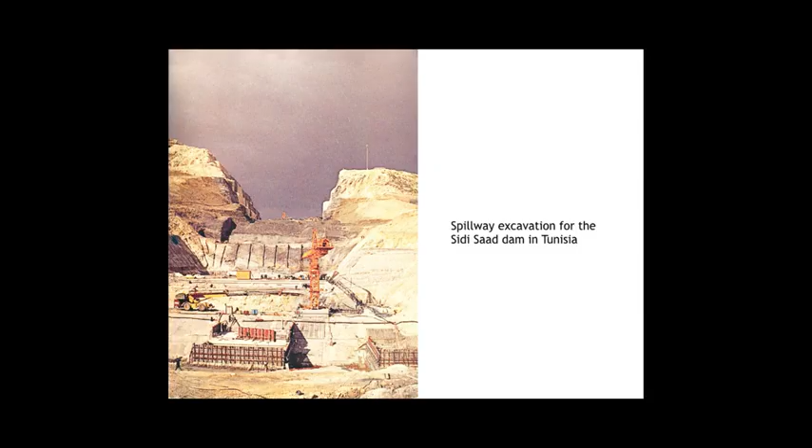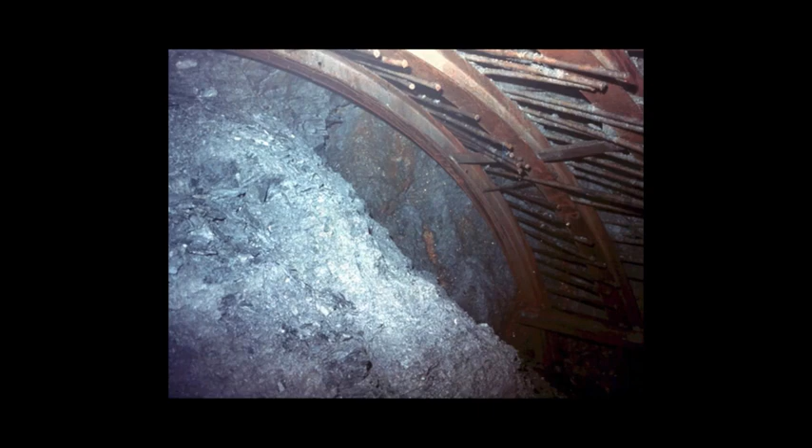There's a tunnel in India mining through a fault several hundred meters wide of very poor gouge material, and the only way that progress could be made here was by a technique of spiling, where what you have is a steel set. You drive ahead, just with a big hammer, steel pins which form an umbrella over the face, and you mine the face half a meter at a time, put in the next steel set and progress that way at several meters per year rate of face advance. That's not really the kind of material I'm going to talk about today.

Most of my experience is in the hard rock field, and weak rocks, to me, are those rocks which fail when subjected to the stress conditions of the environment in which you're working. I've just completed a paper with Don Moy, and the first paragraph of that reads: in the context of this chapter, weak rock is rock which will fail when subjected to the stress levels induced by the excavation of large underground caverns at depths of 100 to 300 meters below surface.

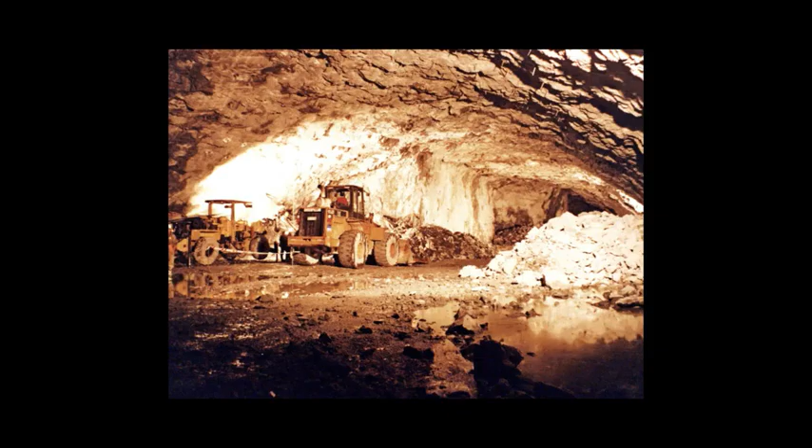Sedimentary rocks such as bedded sandstones, shales, siltstones, and mudstones are amongst the rocks which fall into this category. It's a paper on large underground powerhouse cavern design. But basically what I'm saying is that irrespective of what the intact rock is, if that rock will fail when subjected to the stress conditions of the environment, then as far as I'm concerned, it's a weak rock. And to take a ridiculous example, I'm currently working on a 33-meter diameter spherical cavern at a depth of more than 2 kilometers in the Canadian Shield.

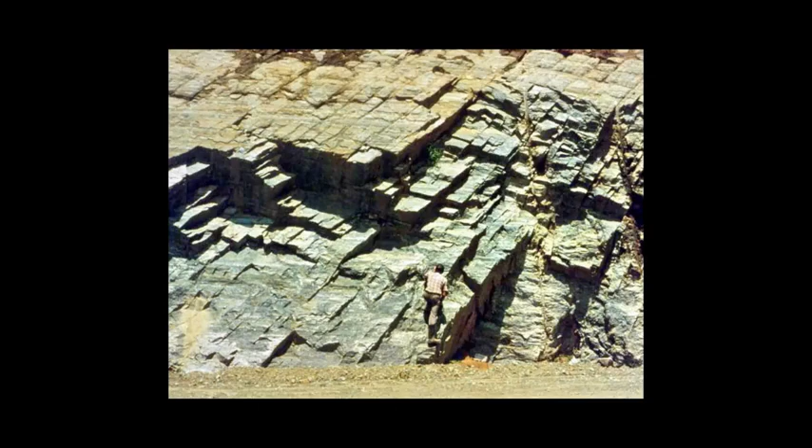And although the rock mass strength might be in excess of 150 megapascals, it will fail under those stress conditions. Now I'm not dealing with that end of the spectrum, but I'd like to pick up a comment made, I think, by Brian Hawkins on Monday, that we shouldn't forget the discontinuities. And it's those discontinuities, the joints, faults, fissures, bedding planes, that make rocks which are otherwise good rocks weak from an engineering point of view.

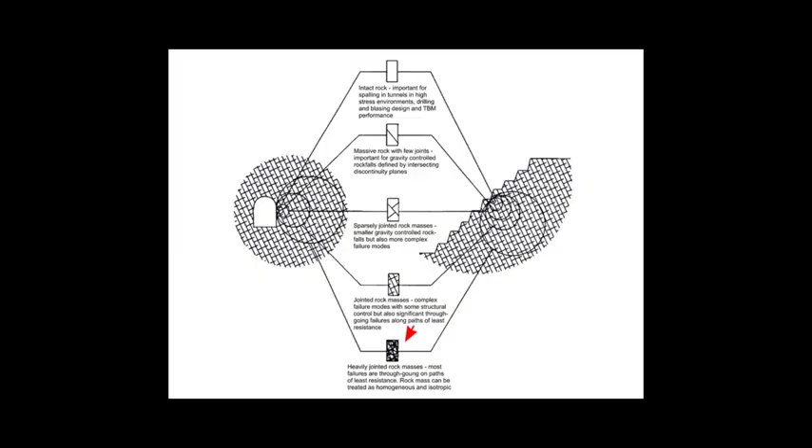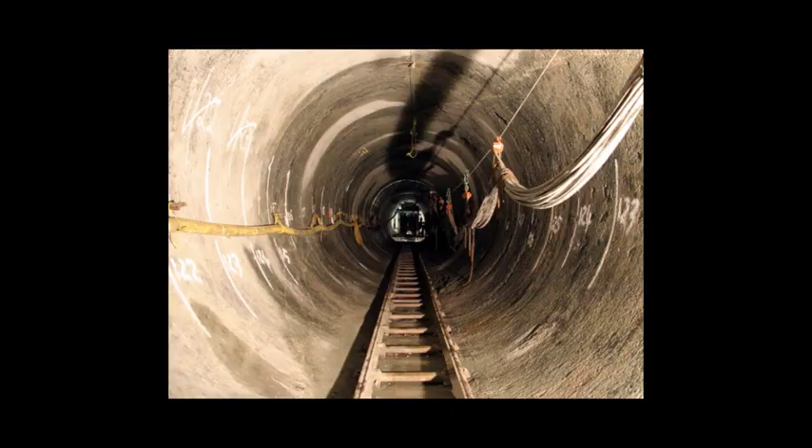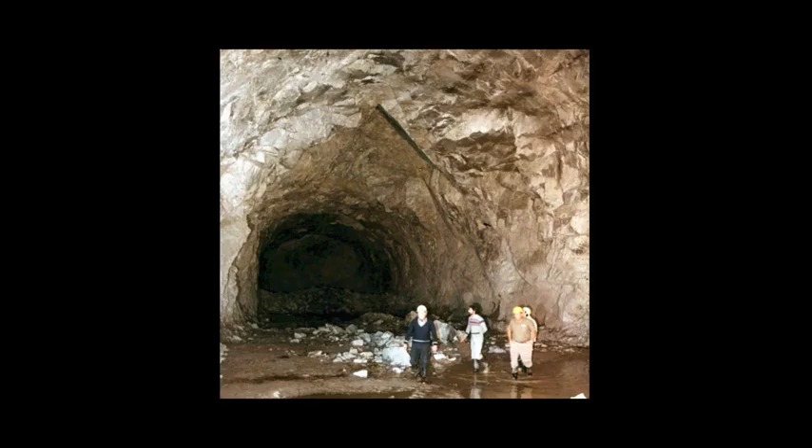But the introduction of one or more discontinuities leads us to the problems of stability in both slopes and underground or foundations that we have to deal with. A few discontinuities in relation to the size of the opening will result in structurally controlled wedges or blocks which fall from the surface of the excavation. But as the intensity, the number, and spacing of joints, to use joints as a generic term, increases, so one gets much more into the situation where the rock will fail almost as a homogeneous material with quite different properties from the intact rock.

In fact, what I'd like to do is to run simultaneously here an overhead, which is a slide from Nick Barton. And I've given the reference to it, if you can read it, right at the bottom there. It was published in a conference in Hong Kong last year. And in that slide, which I'll leave up while I go through these,

he's plotted here his rock mass quality, which is a tunneling index that I'm sure many of you are familiar with. And it's interesting that that index does not contain any reference to the strength of the intact material. It's really based entirely on the number of joints, the condition of the joints, and the degree of alteration. And if we work down from the very hard end, which you've just seen here, down towards the exceptionally poor end, many of the rocks with which we are concerned fall in the category, I would say, from very poor to fair or good in this area here. So I'll leave that on the board as I go through these slides.

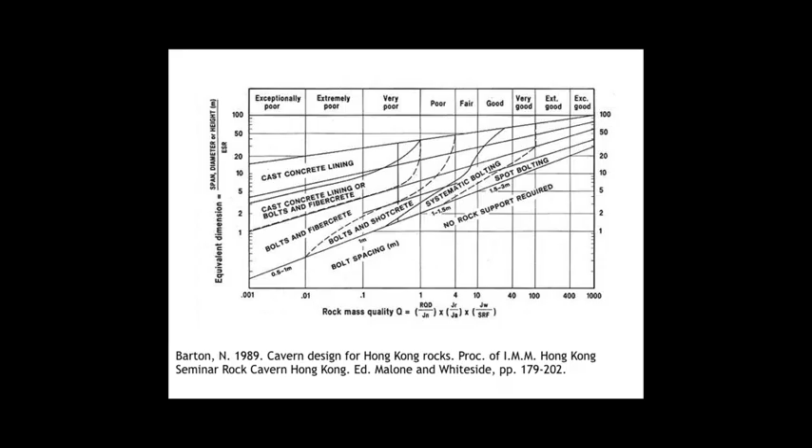This would be at the very good end, but you would have to deal with problems like this by limit equilibrium analysis. This is a typical wedge failure in a slope where you have, as you see there, two intersecting discontinuities with sliding along either one of those discontinuities or along the line of intersection. And the properties of the intact material really don't come into it. You're concerned here with three-dimensional geometry and with the shear strength on those two surfaces.

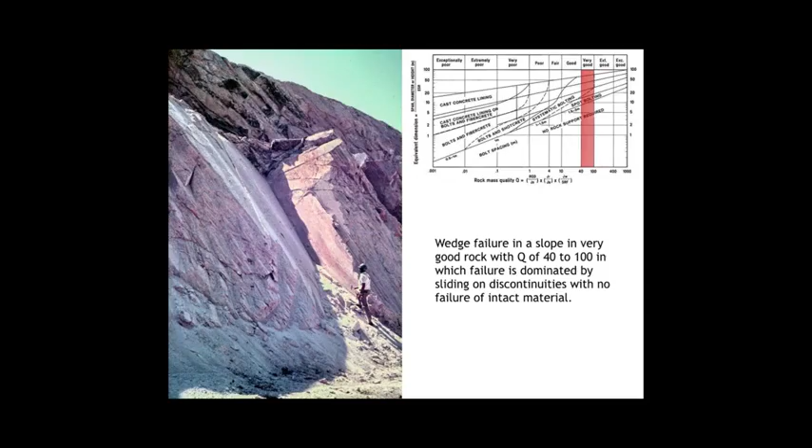So this is not in the category of weak rocks at all, but I'm just passing through this series as we work towards the weak rock end. Similarly, in the tunnel, you have intersecting discontinuities giving you this type of sidewall failure.

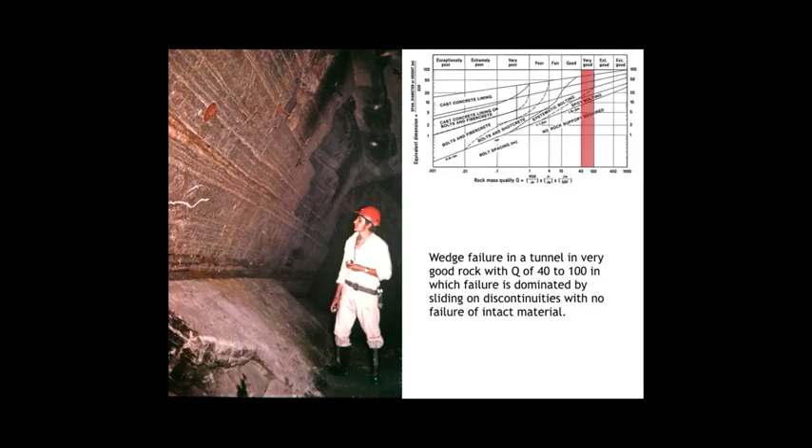As we add more and more discontinuities, here's a gneiss in Sri Lanka with very nice orthogonal jointing and a few weak features running through it. We tend to work more and more towards the isotropic homogeneous end of the spectrum, and in a slope like that, we might expect to see core of this type, where you still see substantial intact rock pieces, clean discontinuities, very little rounding of the particles in the core box.

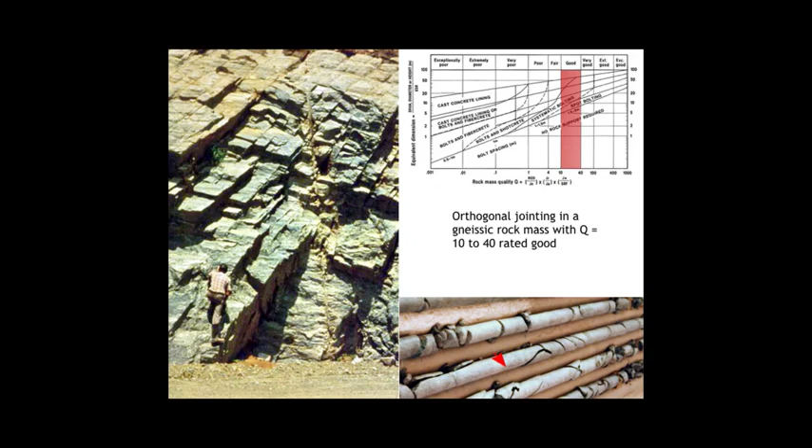A little bit worse, closely spaced and more of them, discontinuities, and we're now starting to get to the point where, on the scale of a very large slope, if you were talking of a slope several hundred meters high or a very large cavern, you might be tempted to look at this rock mass as a weak homogeneous isotropic system with very special properties. And the determination of those properties is something we'll talk about a little bit later on.

So we'd now be talking for this rock mass of something I would guess in the fair category on Barton's classification. I don't know the equivalent. Well, it would be pretty similar in Bieniawski's classification as well, pretty similar category. And we'd expect to see a lot more disturbance in the core here.

By the way, can you see that slide with the overhead on? Yes. It's not bothering you too much.

Okay. So what we're seeing here is fairly close spacing of discontinuities in the core, some disturbance of the core, perhaps some alteration on the surfaces as well, particularly if it's near surface and you've had weathering penetrating down into the rock mass.

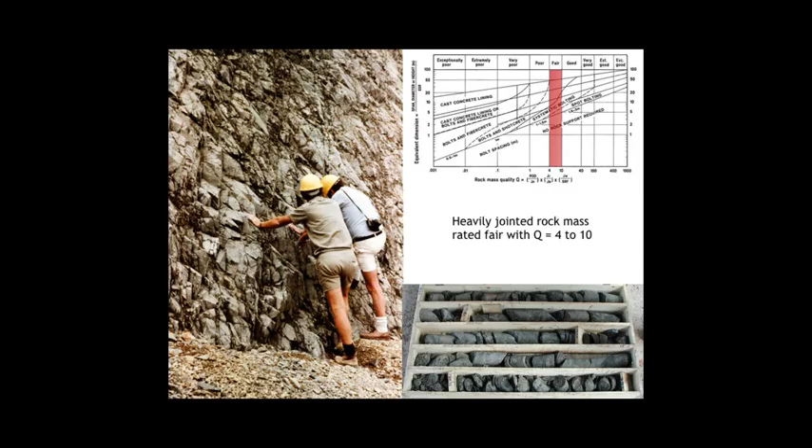And worse yet again, in an underground opening, this time with a lot of weak discontinuities, a pile of rock lying on the floor there. And in this kind of situation, you'd expect to see much, much more disturbance in the core. The core pieces are still pretty much intact. There's relatively little rounding except for a bit up at the top there where you see sort of gravel-type particles. And the interlocking of these particles plays a key role in the behavior of that rock mass. I'll talk about that in a moment.

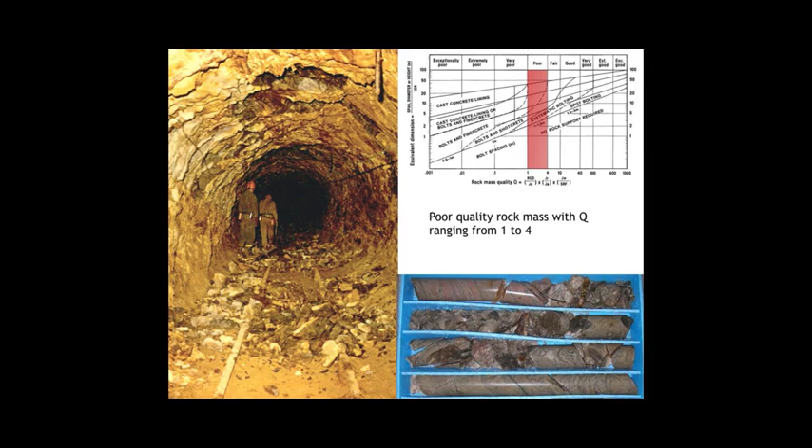So now we've moved down to perhaps the poor to very poor category, and we've moved through the spectrum to a situation where we're dealing with heavily jointed, weak rock masses of this kind. Now, there are other factors that can also influence the behavior of the rock mass in addition to simply the discontinuities. So far, I've assumed that you have a reasonably good rock which is made discontinuous by a large number of joints or bedding planes or whatever.

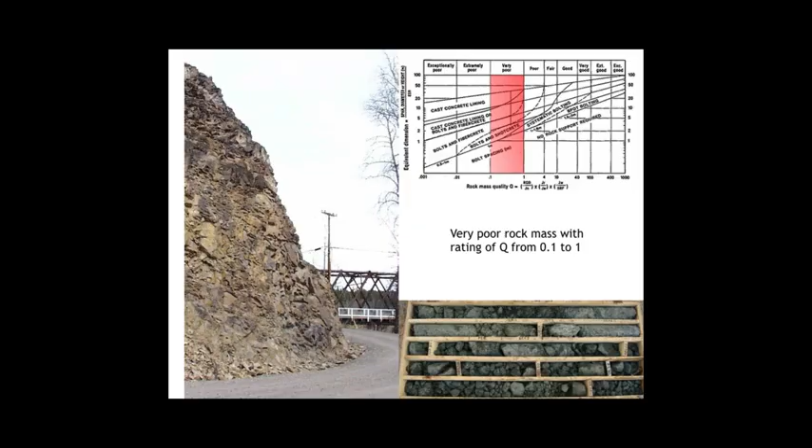But in addition to that, you have weathering or tectonic disturbance of some kind, which takes us into the extremely poor category. Here's a slide from a cutting in Taiwan, and you'll see the rock has been fairly heavily chewed up by tectonic activity. It's very difficult. You can see the remnants of a structure there. You can see bands of fairly hard sandstone in there. But on the whole, that's been fairly deeply weathered and mashed around to the point where it really has no residual directional property on a large scale.

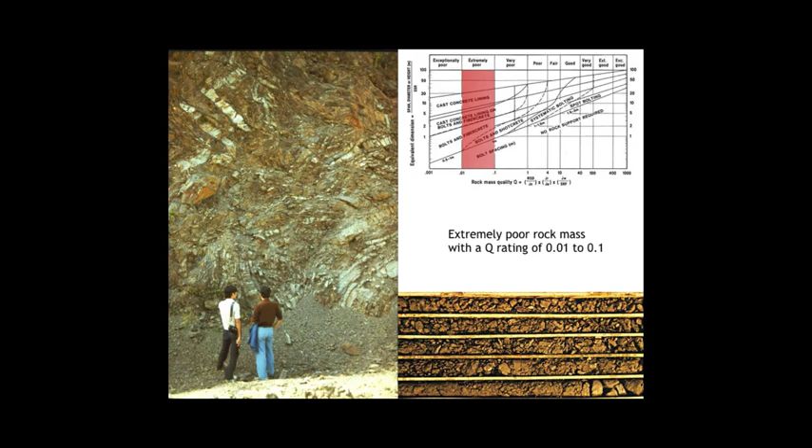Slaking is another problem where on exposure some of the shales will slake like this, and that renders them, at least near surface, weak rocks. And in general, that presents a slightly different problem from the problem of an overall weakness in the rock mass. This is a surface effect, and it's generally dealt with by shotcreting or some type of surface protection.

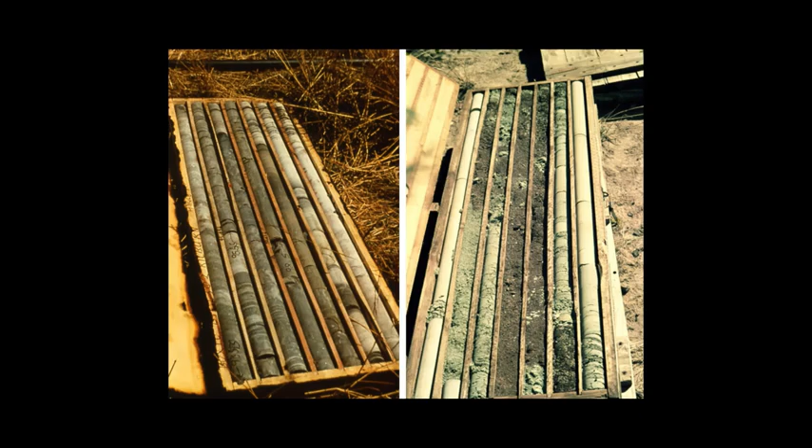A case in point, these are cores from a project in South Africa, the Drakensberg project, and there are a couple of people in the audience who worked on this. And this is fresh core straight out of the borehole, and this is similar core about 6 months later, so that the mudstones have disintegrated completely. Some of the siltstones are still partly intact, and the sandstones, the outer two cores, are still in pretty good shape.

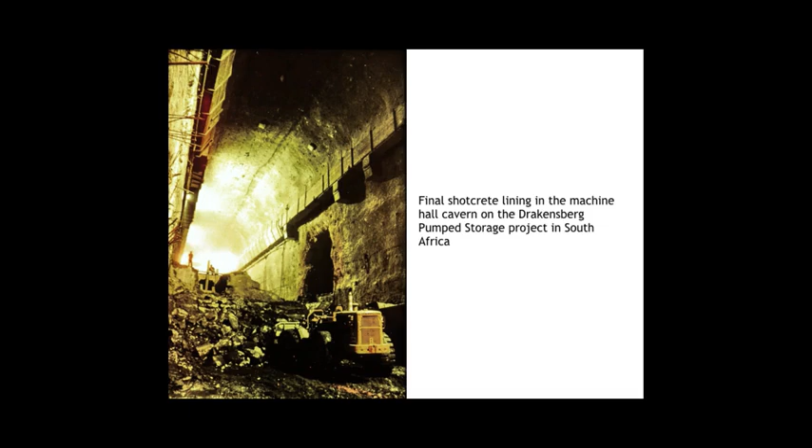Now, in that case, because this was a result of weathering, the technique that was used was to shotcrete all surfaces immediately on exposure. And so right at the face, the shotcrete was applied, and then another layer applied later on for final treatment of this cavern roof. That's a 17-meter span cavern in that type of material.

Now, how about the mechanics of failure of these types of materials? Let's go back for a moment to assume that we're talking about a fairly good intact material which has been rendered discontinuous by a number of joints. In this case, only two. This is an experiment carried out by Ladanyi and Archambault at the École Polytechnique in Montreal.

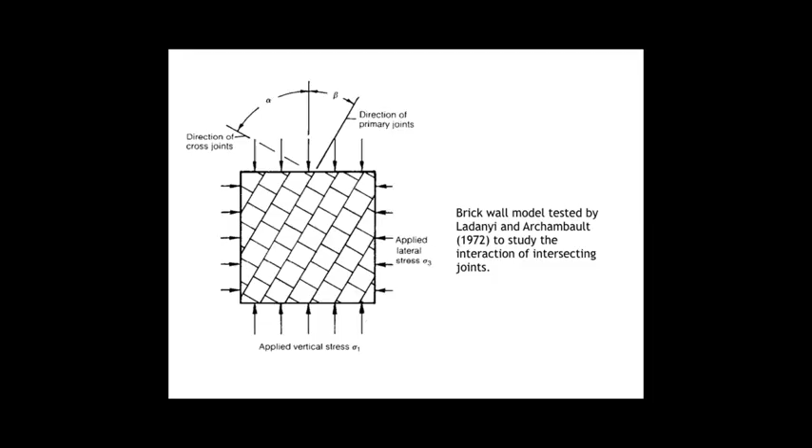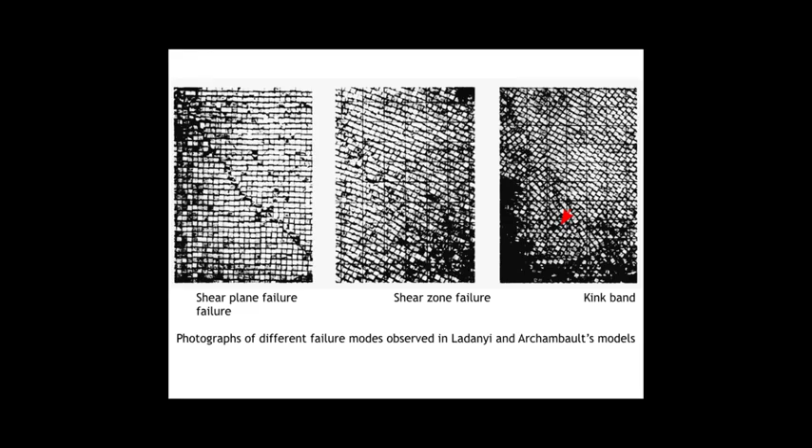It's something that has become evident to us as we've progressed with work on jointed rock masses, that you really have to consider almost two categories. In the one extreme, you could talk about a rock fill, which is a transported material. It could be exactly the same block size, particle shape as this, but it has been transported, and therefore the blocks no longer fit perfectly together. That would be the lower end of the spectrum. The upper end of the spectrum would be an in situ fractured material which has not been allowed to deform, and the strength is quite different between those two ends of the spectrum.

One of the most elegant experiments that was ever carried out was done by Rosengren and Jaeger in Australia many years ago. What they did was to take marble specimens, first of all prepare them for triaxial testing, heat them to about 600 degrees centigrade, at which temperature the differences in thermal expansion break the bonds between the particles completely. So you have little particles of marble completely separated from each other, with the cement bonds completely broken. So you have a perfectly interlocking, low porosity, zero tensile strength material, the ideal weak rock mass.

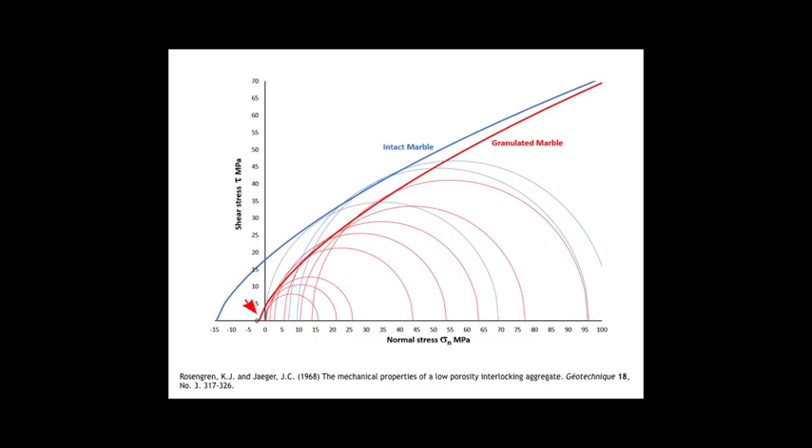And you'll see that you have very little reduction from the intact strength of the marble, which I've plotted there as a Mohr failure envelope. It's highly curvilinear in nature. That's the blue highlighted line. And the granulated marble has zero tensile strength. In fact, this curve really should come down much more sharply here. So it has zero effective cohesion and zero tensile strength. So the granulated marble has, apart from that end, dropped very little in strength because it is perfectly interlocked.

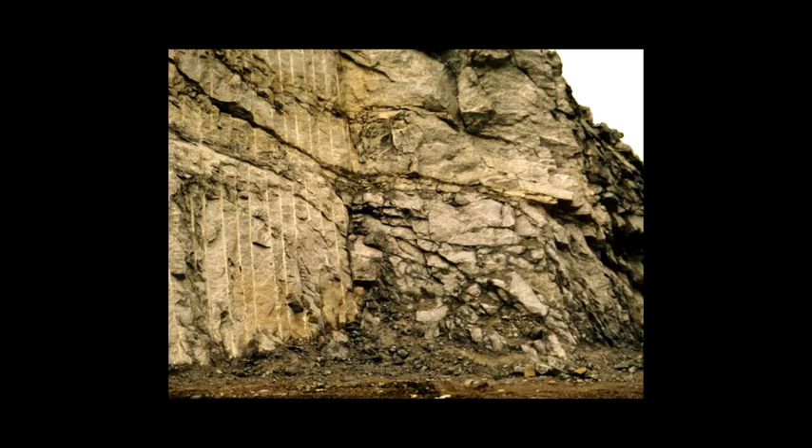You can induce this artificially in the field by blasting. Here's an example from Argentina, where on the left-hand side you have a face that's been created by pre-split blasting, which is probably the most gentle form of mass blasting that we can employ. And on the right is a typical mass blast. You'll see that the particles on the right, particularly those near surface, have been dislodged. The integrity of that whole system has been broken up by blasting.

So the difference between an interlocking strong rock mass and a weak mobile rock mass could be that there has been movement, tectonic or stress relief movement, or you could have just blasted the hell out of it and rendered it weak by your own making.

An example of these two extremes, again, I illustrate with this mine, Bougainville in Papua New Guinea. This is an old photograph. The mine is not operating at the moment because of some internal problems in Papua New Guinea, but it will eventually have a cut height on this side of 1,000 meters. The rock mass is very, very strong granodiorite, 256 megapascal strength, but as you see, very heavily jointed.

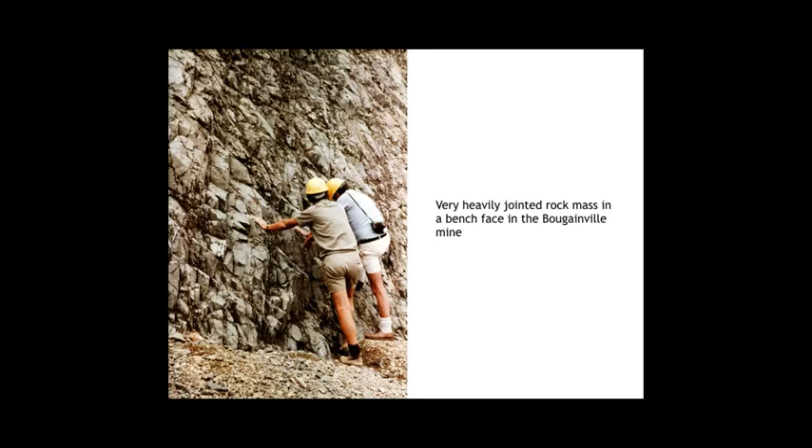The longest piece of core I ever saw in the early exploration days was about 1.5 inches. And so when you're talking about a 1,000-meter high slope with core like that, we decided in our wisdom to treat it as a special kind of soil. And most of the early analysis used a simple Bishop circular failure analysis. You'll see that on a bench scale there is some relic structure. You can see some of the discontinuity sets do in fact form wedges. But if you leave a bench to stand, it just falls apart over a period of several weeks.

Now, the attempts to control the blasting there were very serious over a long period of time, and they found that there are probably 7 or 8 joint sets in that rock mass. There are enough discontinuities that the blast gases just vent into these and destroy the rock for up to 150 meters or so behind the last row of blast holes.

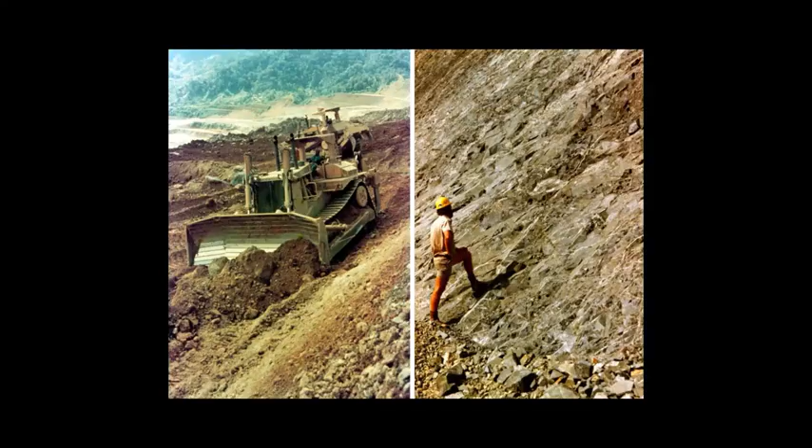And just a practical note, when you're blasting in the scale of Bougainville, they move about 200,000 tons of rock a day, and each blast is about 75 tons of explosives. So it's very, very difficult to control that size of blast, to make it very gentle. So eventually they decided to stop the blasts short of the face and to rip and doze. When you're approaching a final face, the blasts are now stopped about 19 meters from the final crest line. That rock is still damaged, but only marginally so.

And then D10 dozers move in and basically rip and doze the final face, so that what you end up with is that sort of face. It stands at 55 degrees, and that's controlled by the jointing in the rock mass. You can literally go and mine that by hand. You can go and pick out pieces quite easily. But as you see, with a very gentle process of dozing, you've left the rock mass intact, or rather interlocking, and largely undisturbed. And all of the final faces on Bougainville will eventually be done by ripping and dozing.

This is a trial section that you see back here. The benches will be triple bench, so they'll be 45 meters high, cut by D10 dozers. And the essence of that little story is that what they've tried to do is to leave the rock mass as undisturbed as possible, to keep it interlocked, to keep the little pieces tightly together. This is dry work.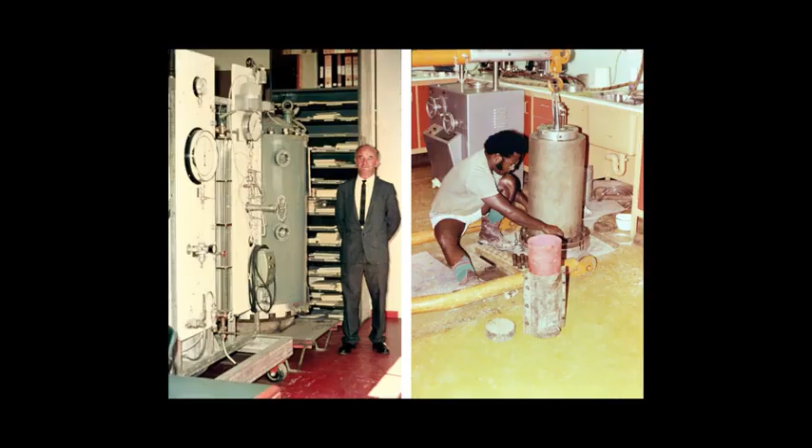How do we test these types of rock? Well, this is a major problem, because in general you're talking about rocks which might have strengths from 50 to 250 megapascals intact strength. Although that strength might drop by a factor of as much as 100, you would still be faced with uniaxial strengths of, let's say, 2 to 10 megapascals. And to test that on a realistic scale, you would have to talk about blocks of several meters in dimensions. And it really is extremely difficult to do this.

In the early days of Bougainville, attempts were made to test the rock in rock fill cells. This is a 22.5-inch diameter, 46-inch long specimen-sized cell in the Snowy Mountains Laboratory in Cooma in Australia. This is the cell back here. And samples were gathered at Bougainville, shipped down to Cooma in 44-gallon drums, poured into the cell, lightly recompacted and tested. But from what I've just said, you'll realize that this rock was completely disturbed. It had been transported, and no way in the world could you put together that interlocking matrix that existed in the original slope.

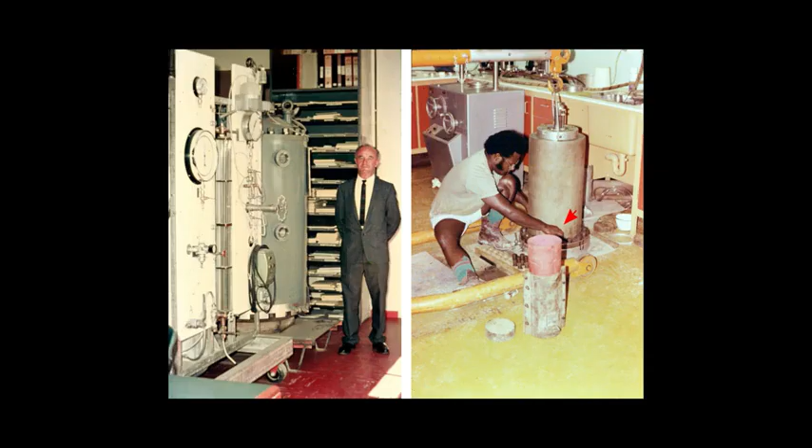So it's a very difficult subject in which to get real hard data to work with. There have been a few other tests done, but very, very few in nature. So it's a major challenge to the geotechnical community. How do you actually test jointed rock masses, which are weak from an engineering point of view, on this kind of scale? It's a huge problem.

You can do some in situ testing, and this is on a small project in Taiwan, plate bearing tests to determine the modulus of deformation. These work reasonably well if the rock mass modulus is, I would say, less than about 10 gigapascals.

I'm just going to change this over.

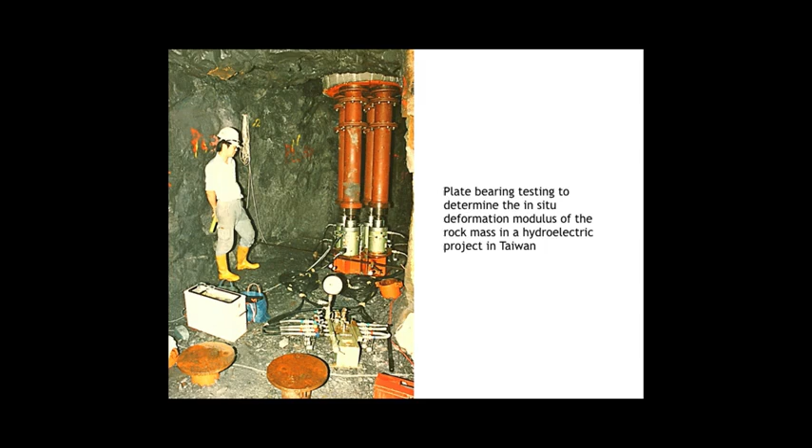But for harder rocks, they really don't work because you can't get enough load into the equipment and you can't measure the deformations accurately enough. So I actually prefer to use this graph. It's a lot cheaper. And in general, it turns out to be adequate for most applications.

One of the things that I would bring to your attention is it's really necessary when you're contemplating what tests you need to do, what site investigation you need to do in this kind of rock mass, is ask yourself, first of all, what difference does it make? And it's usually very beneficial to do a lot of sensitivity studies.

Let's say that you're involved in designing a concrete gravity dam, and you're looking at the foundation modulus. Run through a series of studies and see whether it makes any difference. And very often it doesn't. Very often you could go from say 10 to 25 gigapascals and not see any change at all in the stresses in the dam or the overall stability of the foundation.

So I think you really have to ask yourself when you are contemplating these horrendously expensive tests, how accurately do I need the results and do I really need to do this? And I find personally that little chart by Serafim and Pereira, RMR there, by the way, refers to Bieniawski's rock mass rating, is adequate for many of the foundation or cavern type studies in which I'm involved. Obviously, if you find from your sensitivity studies that you do have a problem, then indeed you may have to contemplate tests of this kind.

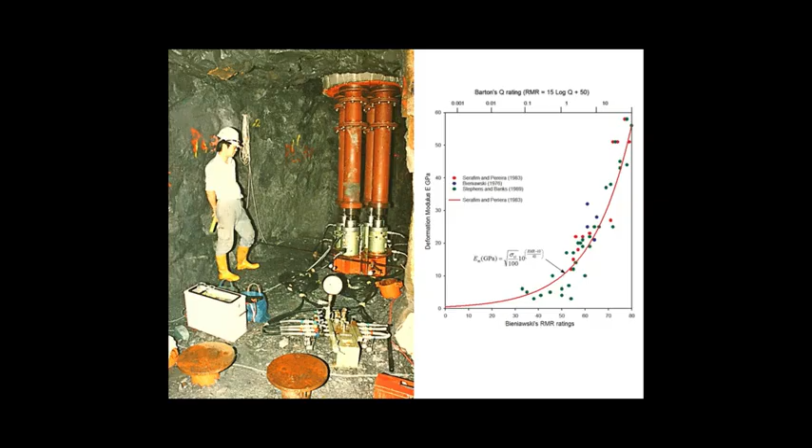But be aware that they extend only over a relatively limited range of deformation moduli, because once you get above, let's say 40, certainly, you'd find that you simply couldn't measure it, because you can't measure the deformations and you can't get enough load into your equipment to do that.

I'm just going to switch this off now.

I'd like to suggest another technique, and I was encouraged recently to find a Japanese paper. Unfortunately, I don't have it with me, so I can't give you the reference, in which it was suggested that one of the best ways of studying the behavior of weak rock masses might be the back analysis of deformations of large-scale openings. That's a fairly obvious statement, but this guy has actually laid out some methodology where one might be able to do this.

And this is an example from Taiwan, the Mingtan pump storage project, which is located in the geographical center of Taiwan. It's a 25-meter span cavern in interbedded sandstones, siltstones, mudstones, shales. There are 21 faults running through the cavern area, so it's a weak rock mass.

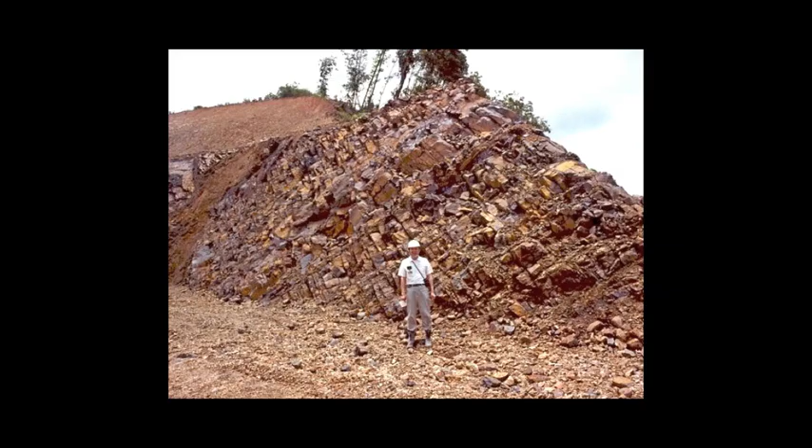And this is a typical surface outcrop on the site. The hard pieces you see there are the sandstones, and the rest you can use your imagination on. Not a great rock mass to build a cavern in. In underground exposures, this is one of the exploration adits, and you see occasionally thick layers of the strong sandstone interbedded. In this case, there's a bedding shear there, several centimeters thick, interbedded with siltstones and mudstones and a whole sandwich of garbage.

The many analyses were carried out on this project, including ongoing nonlinear analysis as the cavern excavation progressed. But in the context of this discussion, what was important was that we were able to get in from this drainage gallery, which is 10 meters above the cavern crown, long before the main excavation started. That was carried out during a preliminary contract.

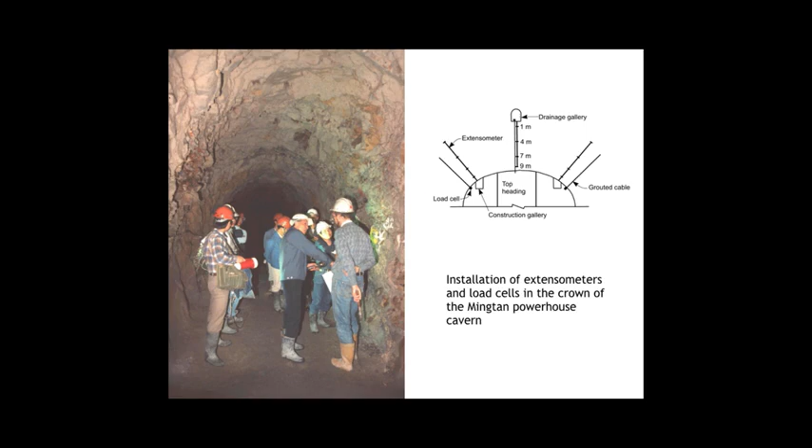Reinforcement was placed there, but more importantly, extensometers were placed from that location along the cavern crown before excavation started. So we had very close to a zero reading on those extensometers. As the cavern was excavated from a top heading, slashed out, and then benched downwards, continuous monitoring was carried out, and the results were reanalyzed throughout the program. That process has not yet been completed, but the early indications I'm going to use here to illustrate what one might do in terms of back analysis of jointed rock mass behavior.

Now, this is on a real scale. You're talking here of tens of cubic meters of rock. The distance between those two excavations there is 10 meters. This is the central top heading that's used to start off the excavation. And there were extensometer points at these distances here, 1, 4, 7, and 9 meters from the measuring head up here. And the measured dots here are measured displacements. 30 millimeters, you see, is the measurement at that point there.

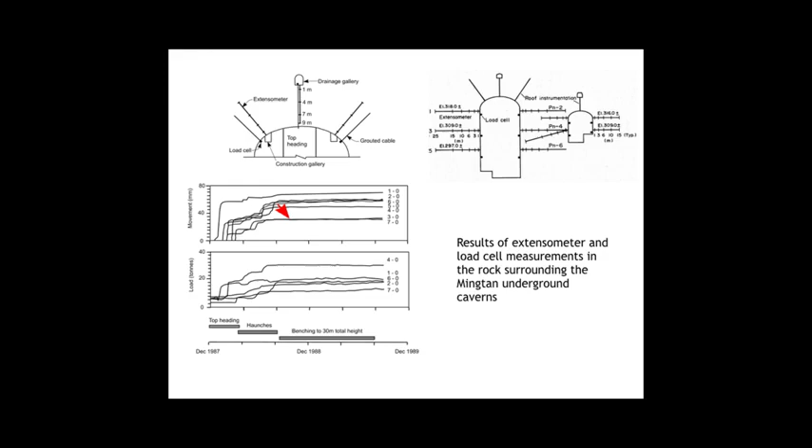Now, in order to fit those measurements to the rock mass properties, it was found that a halo of about 2.5 meters had to be put around the excavation. This represents partly blast damage material, but partly material which has been rendered weaker by relaxation. As the excavation is created, it relaxes inwards. And you'll see that the properties are quite different for these two materials. This is a progressive failure type analysis using a finite difference method.

And you'll see that here we have a modulus of 60,000 kilograms per square centimeter. Forgive the units, but you work in the units of the local currency, as it were. And this is in Taiwan. Cohesion of 10 kilograms per square centimeter. Friction angle of 50 degrees. Friction angle of 50 degrees might alarm some of you from the soil mechanics field, but it's not at all uncommon where you have these very strong interlocking rocks and you're working at very low stress levels, so that the failure curve is highly curvilinear and in fact comes down to a 90-degree friction angle at zero tensile strength in a truly broken material.

So 50 degrees, cohesion of 10 for the, should I say, undisturbed material, and in the immediate vicinity of the top heading, a third of the modulus, 20,000 kilograms per square centimeter, the cohesion drops to 3, the friction angle to 40. And as I say, it may be that this represents one of our best techniques for analyzing the strength of jointed rock masses once we have adequate numerical tools to do the job properly. I'm not convinced that our current numerical tools do that, by the way, and that could be the subject of another week's discussion. But we're getting there. The tools are getting better.

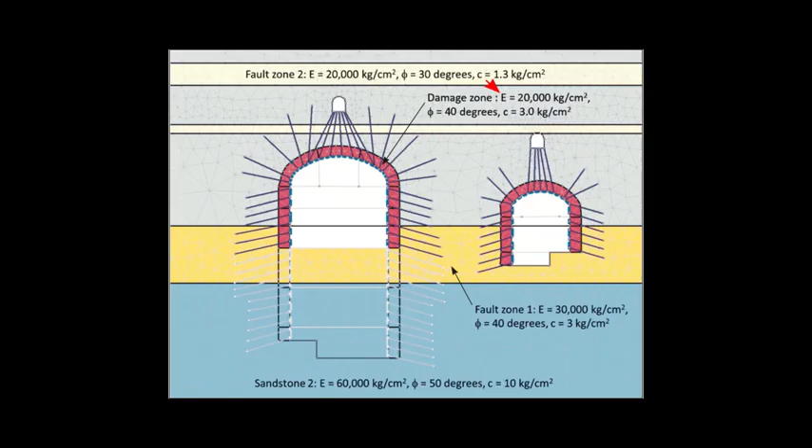And as I say, I was encouraged to see a recent Japanese paper where a methodology for doing this was laid out. And we will see over the course of time whether we can add to our sum total of knowledge, which is not fantastic, as you can gather, on the behavior of jointed rock masses.

That cavern, by the way, is now complete. This was in the early days, and in spite of our best efforts, you see the blasting isn't fantastic. You can see the dipping structure of the bedded sandstones here, giving you a fairly ratty roof. But as you move away from that, as the excavation grows larger, and there's a good layer of shotcrete on there now, that becomes less and less significant.

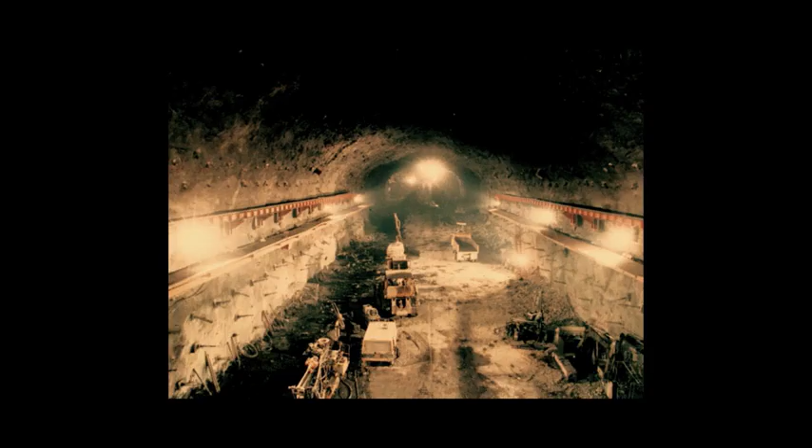And finally, when the cavern is complete, and it still had a bit to go when this shot was taken, you end up with a pretty good-looking cavern that's 25 meters span, 46 meters high, and in spite of the rock mass being of a poor quality, it's still manageable provided one treats it with tender loving care from the first to the last stage of excavation.

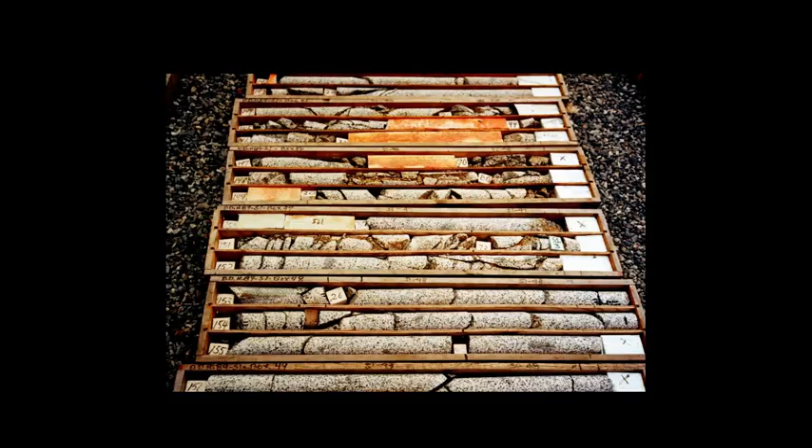Yeah. Okay, Tony Biddle, Billington Osborne Moss Engineering. Can you tell me the diameter of the cores that you used in order to get an appreciation of the overall strength of this rock mass that you were talking about as being the most successful method?

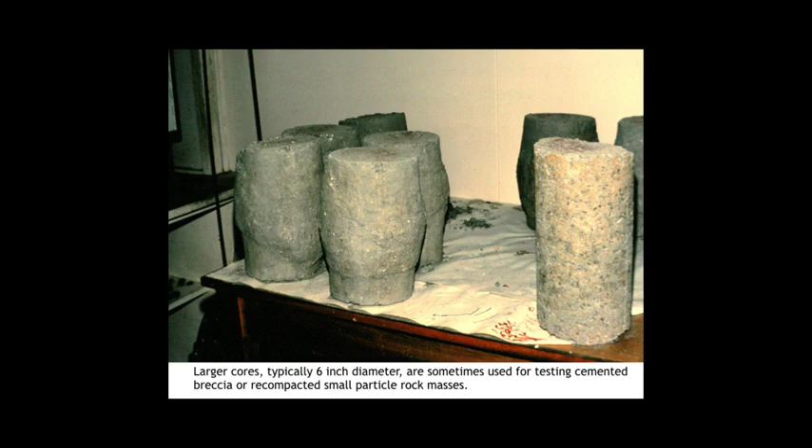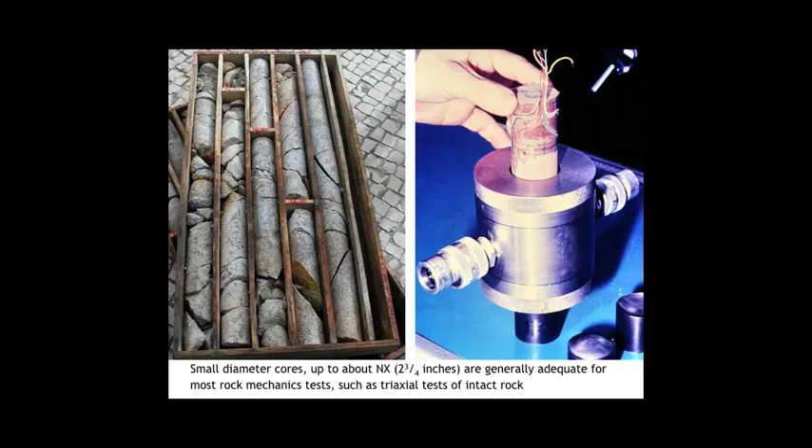Yes, there are several things. The tests that were done in Australia by Jaeger were 6-inch diameter triple tube cores. So they were drilled from the sidewall of an adit, in fact, 6-inch diameter. But in general, it's very difficult to justify going bigger than NX, which is about 2 and 3/4 or so. For most engineering projects, you have to make special provision for large core drilling.

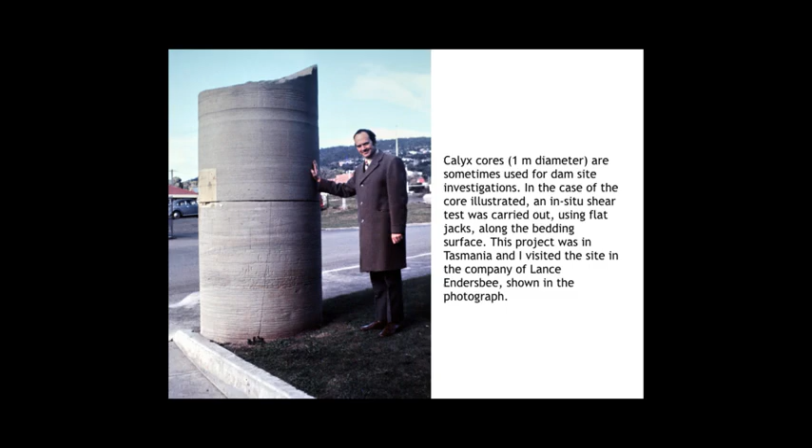There are cases where you might go to Calyx, which is 1 meter diameter, but you can only use that in very shallow dam foundation type studies. In general, we work with NX size of cores, that range of cores, because in real engineering terms, that's about what you can justify.

Arinos Tavares from Brazil. My question, Dr. Hoek, just answered. You showed here that you have been using triaxial tests in order to determine the shearing strength of the rock material. And my question is in the direction of the economy. You don't think that if you use direct tests, it will be less expensive to evaluate the shear strength of this type of rock?

Yes, what you're saying is, should we not do direct in situ shear tests or triaxial tests? And indeed, many proposals have been considered for that. On Bougainville, I remember we talked about building a big shear box which we could drag behind a D10 Caterpillar and perhaps put something on top of it to form the normal stress. But it turned out not to be practical.

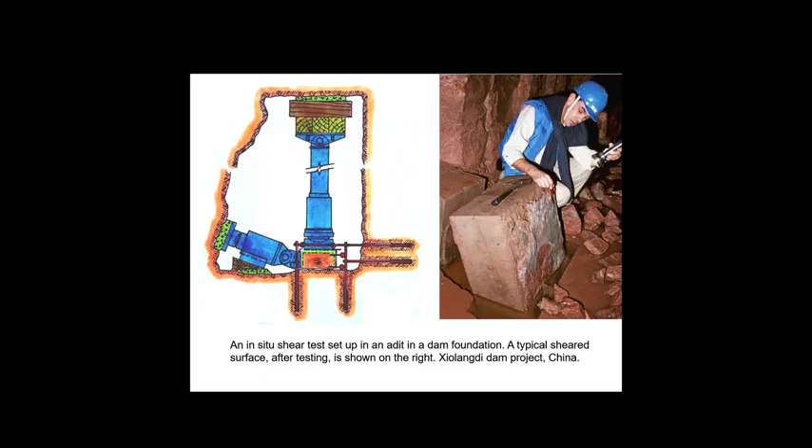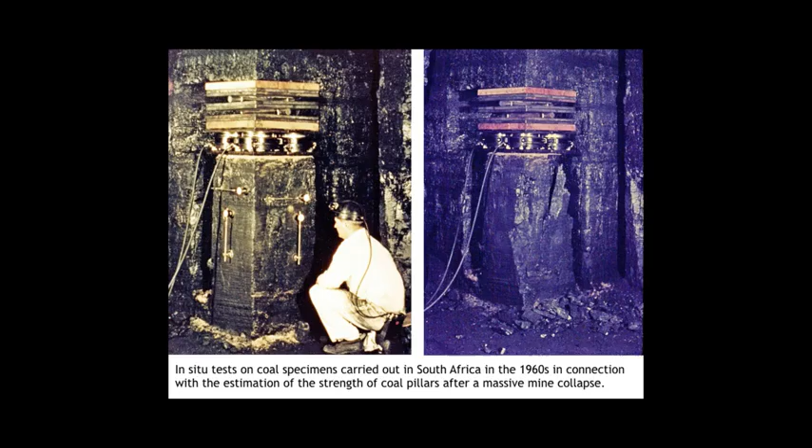And I would say if you can devise for the critical areas on your project where you need to do the test, a reasonable in situ test where you think you're going to get enough load, enough displacement, enough control, then it may well be cheaper. But another subject altogether, which I haven't really touched on today, is there are methods where I think you can use these classifications to estimate the rock mass properties to an adequate level that at least you can do all of your preliminary studies.

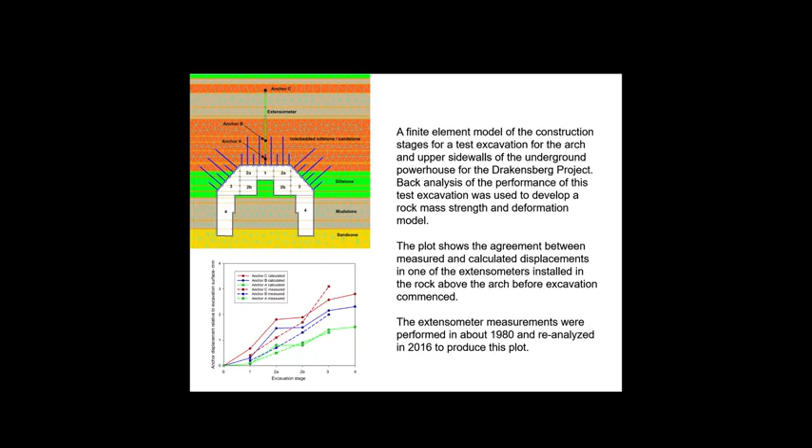And again, I agree with Professor Oliveira that you really have to define your problem very precisely before you embark on either triaxial testing in the laboratory or in situ testing, which I would think may be even more expensive. I think so. Okay. Thank you.

John Hudson, Imperial College. You showed these graphs of the RMR, and you do some calculation like -10 and divide by 40, and the RMR is composed of 5 attributes of the rock. Now, I'm always amazed that works at all, that you take these 5 attributes and they're somewhat subjective perhaps in measuring them. And there's a paper later on this afternoon where there's different functions of the RMR for the modulus.

Now, the question is really, are you surprised by the fact that you can perform these manipulations on the RMR, which is very empirical and not arbitrary, but you have these classes and so on. Now, why is that? Is it because everything comes out in the wash with these discontinuities and you get a good answer, or did you have a sort of feeling for why it works at all?

Yeah, I think that's a very good question, John. And I've just run a short course here, and exactly the same point came up in discussion during the course, because that equation does not contain any reference to the intact modulus. And then the question is, how can you calculate a modulus when you don't have a starting point?

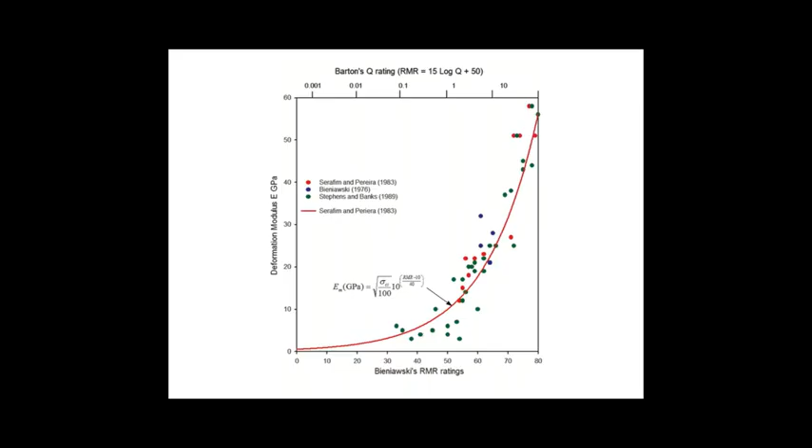We have recently at the University of Toronto been looking at what makes jointed rock masses tick. And it seems to us that the critical components are the block size and shape, assuming that you have enough of them, and the condition of the discontinuities, whether they're sheared or clean and rough.

And if you think of both Bieniawski's and Barton's classifications, both of which were derived for tunnel support rather than for rock mass characterization, they contain redundant terms like groundwater, which we exclude from our use of them. Nevertheless, in the graph that I showed when I was talking about rock mass strength, there's no intact strength included in Barton's classification, nor is there a modulus included in Serafim and Pereira's chart.

And I think the answer is that it does come out in the wash. In general, what that means is the types of rock with which you are dealing would have intact moduli within a particular range, and if you're talking about strength, would have an intact strength within a particular range. And although it's there in the guts of the equation, it's swamped by the discontinuities, their orientation, their degree of interlocking, and the condition of the joints.

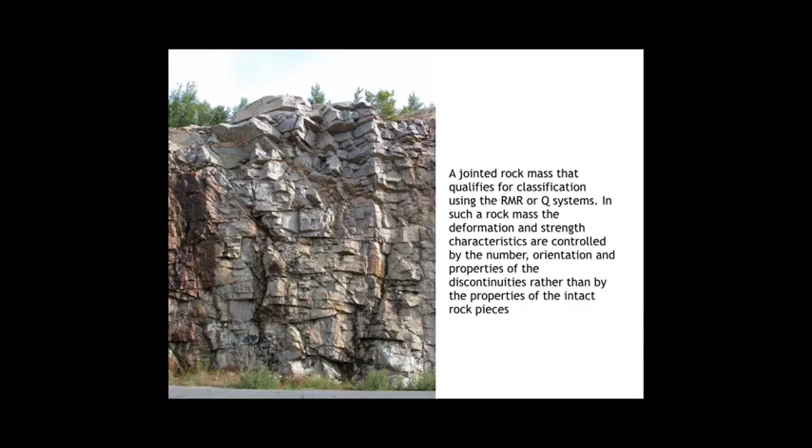And I've recently had an MSc student look at that equation, and we've gone back and plotted modulus ratios, and you get scatter all over the map. It really doesn't work as well as the simple relationship that was shown on that graph. So I don't have a terribly precise scientific answer, but to use your words, it comes out in the wash. And in the end, that's what matters.

Mike de Freitas, Imperial College. I wonder whether Professor Hoek could say something about the role of water in these materials. Quite a lot of the excavations you go into in reasonable rock that is relaxed exhibit quite clean joint faces, which are now iron stained. In other words, the rock mass, which was once an aquiclude, didn't have any water travelling through it, is now connected with something that has got water, and is containing water. What does one do with calculations when this is likely to occur, and what sort of instrumentation would you recommend under these circumstances?

Thank you. Again, a good question. Water, I think, has many roles in the behavior of jointed rock masses. I was just a few days ago underground in some small mines in Zimbabwe, and they've had several years of dry weather now, so you can go into areas where there are gouge zones which have dried out completely and desiccated, and if you tested them as soils now, you'd have friction angles of maybe 20 degrees.

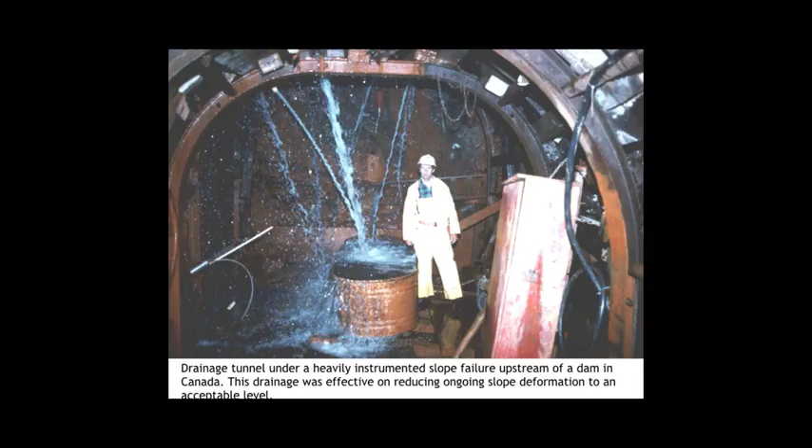But the next heavy rain, all hell is going to break loose, because those are going to revert to weak, saturated clays, with friction angles of maybe 11 degrees or something like that. So the chemical action of water, I think, as a weathering agent, as an additive to materials that react badly in the presence of water, is important.

But in general, in weak rock masses of the type that I've been talking about, where you have maybe staining, but where the properties of the surfaces do not alter materially with wetting, I really tend to treat it as a pore pressure problem, an effective stress problem, so that stability analyses, both underground and surface, would look at it as a simple effective stress problem. You'd look at piezometers as your instrumentation. You'd look at drainage and grouting as your water control measures, in much the same way as you would in any other rock mass.

John Sharp from Geoengineering. I know Evert well enough, so perhaps you'll forgive the question, but since he's involved in research, and some of us have to sort out practical solutions on an everyday basis, it is this question of the strength of rock masses that is of great fascination. We've touched on deformability estimates from things like RMR. But when we come to strength, particularly of a constrained rock mass used in an underground sense, I think we're an order of magnitude into more difficult problems. It was just to have the opportunity of asking Evert how he sees things going.

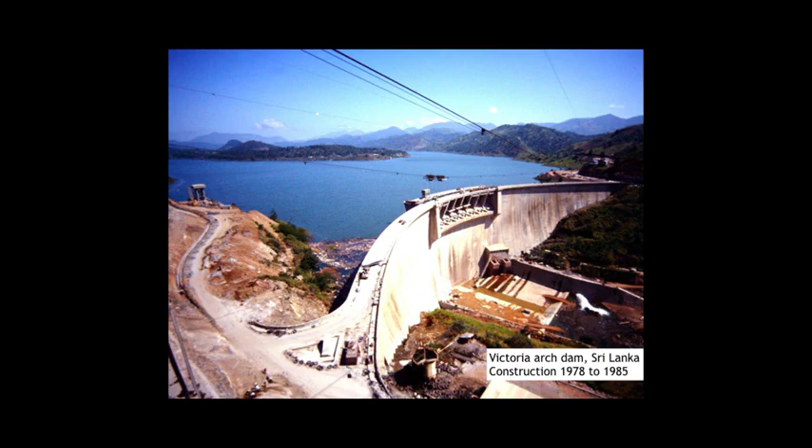Well, it is, John, a long topic. In terms of the response to stress paths and so on, I really cannot conceive of a better method than the back analysis of the full-scale structures. Probably the simplest being dam foundations, because there we have a fairly well-controlled load, the impoundment water, and incidentally, a lot of those points on Serafim Pereira's graph come from back analysis of dam foundation deformations.

And I think one has to try and think on the scale of the problem at hand. So this is why although I've mentioned testing, and Professor Oliveira has said the same, you really have to be very, very careful that you test at an appropriate scale. And in many cases, it's just not feasible to do that. You just cannot get your hands on a big enough piece of rock to do that.

So I have spent a lot of my last 20 years looking at ways of trying to estimate rock mass strengths, and I wasn't going to show this, but since you've pushed me towards it, this table, which horrifies me, is one of the few around that I'm aware of that actually attempts to relate rock mass properties, in this case two constants m and s, which are rather like c and phi. They're nonlinear, but their m is equivalent to phi or tan phi, and s is equivalent to c.

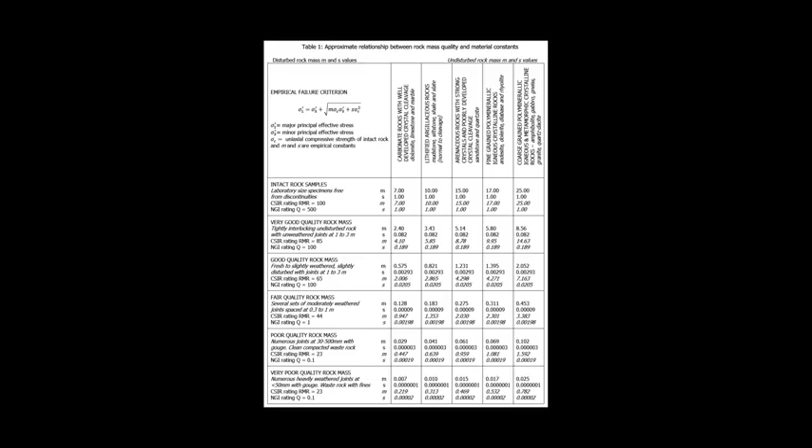But there has to be some ultimate mechanism to enable us to link real solid engineering geology observations that can be carried out simply and quickly and cheaply in the field, and at least a good estimate of how that rock mass is going to deform and fail. Because in real terms, that's the only practical tool we're going to have for most of our studies.

Now, if you've got that, and this, for want of something else, is used currently for feasibility studies, for preliminary scoping studies. Once you've done that and you determine that you do have a real problem, then, as Professor Oliveira says, you either take that material out and don't waste your time testing it, or you devise a set of tests specifically to solve that problem.

But there has to be some, in my view, mechanism like this, and I wish more people were working on it. I feel awfully lonely out there. I'm not a geologist. I wouldn't know geology if I tripped over it. I'm a mechanical engineer. And yet this graph has been taken and used by people because there isn't anything else. I wish there were.